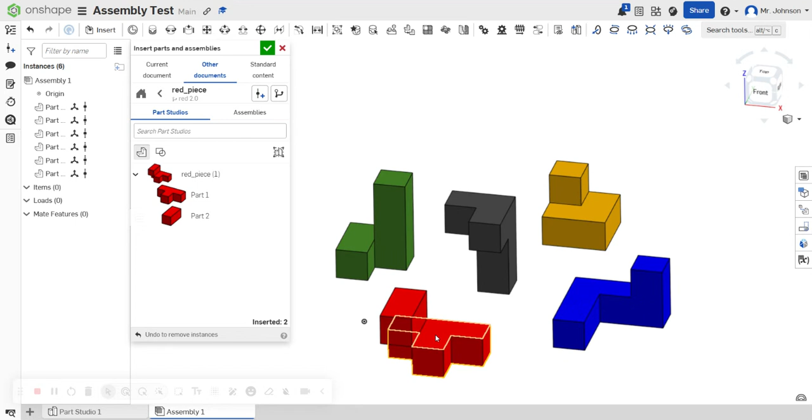There we go. So I bring the red piece in, and the first thing I do after clicking that red check is I'm going to highlight all of the red piece.

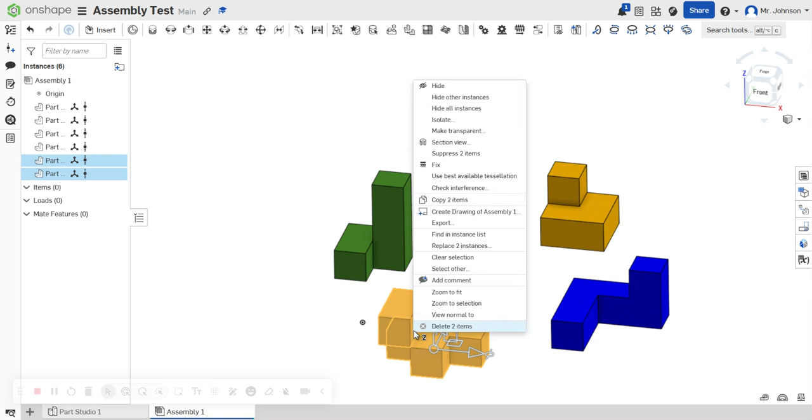You know what? If I lasso it from the bottom, maybe that'll work. There we go. So I lasso it from the bottom and it works. And then I right click on it and select Fix.

Now, all of these other parts I can move around, no problem, and they were all created the same way. They don't fall apart. But for some reason, the red piece, when I move it around, it always falls apart.

In this video, historically I would have used one of these mates. I would have either done a parallel mate or a planar mate, and that's been giving me a lot of issue. So I look at the way the red piece is.

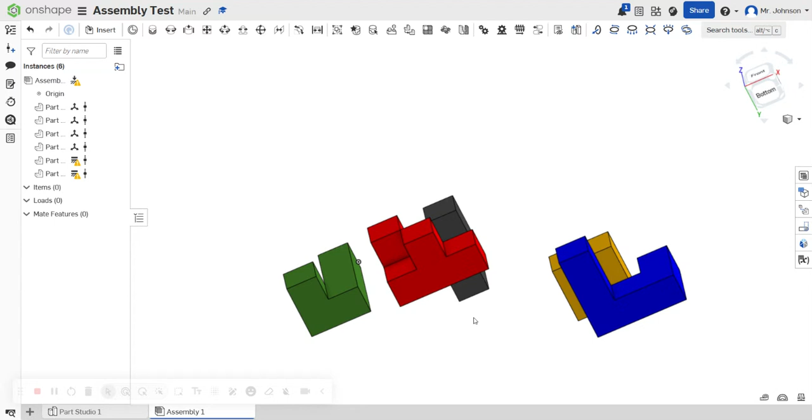So I'm going to orient it. What way do I need it to be? And so I have the red piece like an L shape, and I am going to then revolve this till the red looks like an L piece.

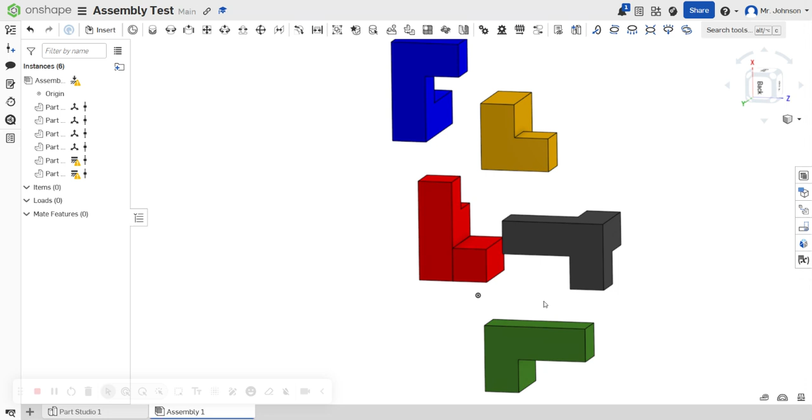Like that. And then I know that this black piece, if I click on the black piece just with a regular click, I can do things like I can orient it, I can slide it, and you're going to assemble these pieces in 3D to be where they need to be.

Now, I'm not going to show you the solution, but the red piece and the black piece go together kind of like that.

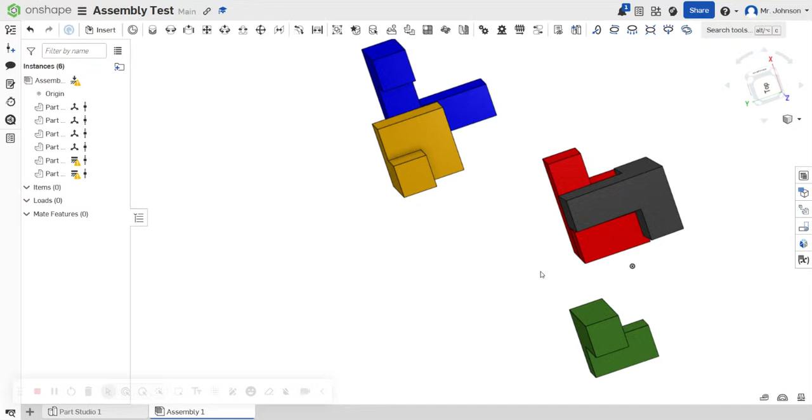And then I can just move this piece in to where it needs to be. And maybe once I get close, then I can do like a planar mate between this and this.

And then this is where it gets crazy, and then I've got to move this back over. But by making a planar mate there, it totally should work.

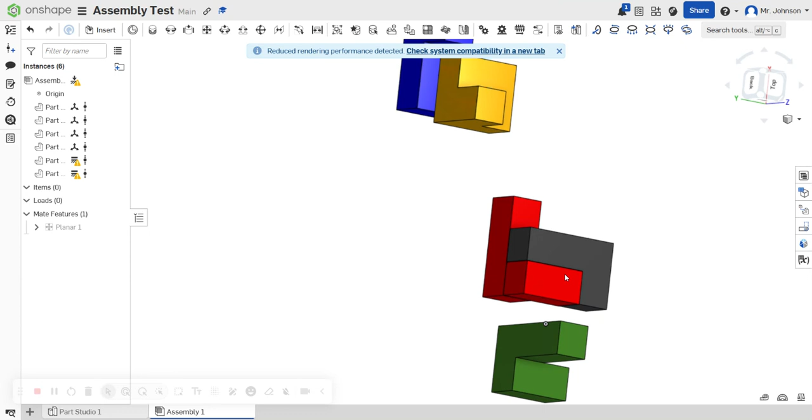And then I used to be able to make a planar mate right here and right here, and it shouldn't have moved. It should have stayed in one place, but that's why I say don't play around with the planar mate too much.

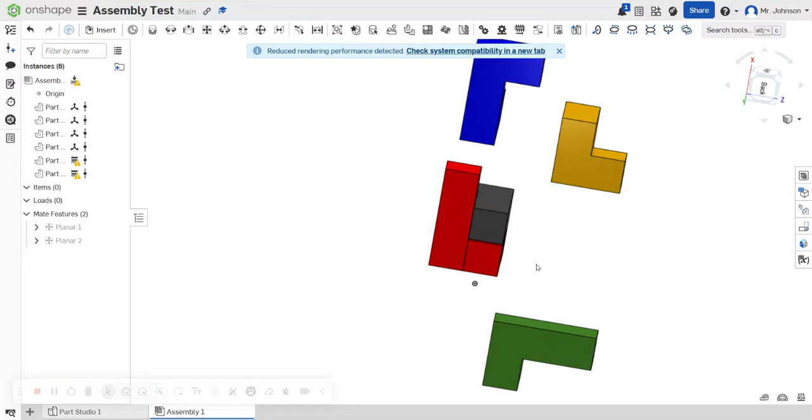But at that point, I have that these two, the black and the red, are on the same plane. And over here, the black and the red are on the same plane. If lastly, I do these two on the same plane, it should perfectly snap in, but it doesn't.

So get it as close as you can. Assemble this all together in a cube shape. When you are ready, let me know, and I'll come by and check off your cube.